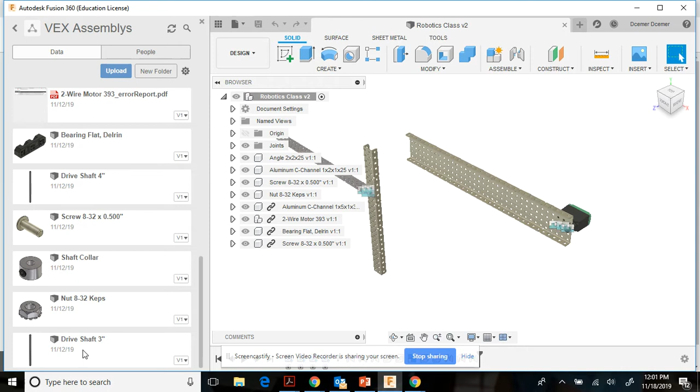So we're going to start with this drive shaft today. Drag that into your assembly. Once again, if you notice my workflow, I try to make sure that I move the parts as close to my work area as I possibly can without overlapping them.

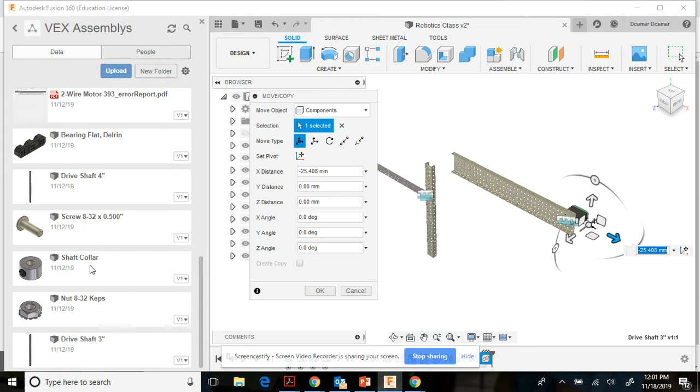Press enter. We'll also use this shaft collar, so that will need to be moved closer to the work area as well.

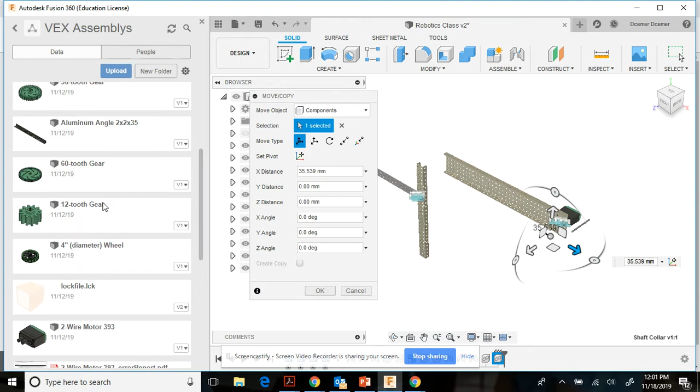We're also going to experiment with a 12-tooth gear. Say okay to that movement and then bring in the 12-tooth gear. Finally move the 12-tooth gear close to the work area as well and press enter.

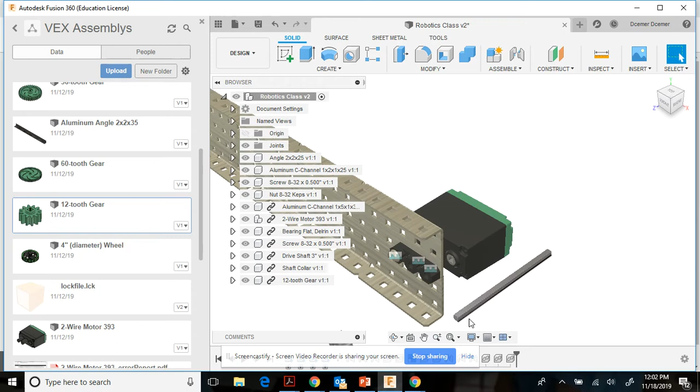Let's set a good zoom level for ourselves where we can see all of these parts, and we'll close out the data panel because we won't be using that again for day 4 activity.

A couple of items of concern as we're about to start on this joint. For a revolute joint, we need to be able to access this circular end point of this drive shaft. If you're not zoomed in close enough, you will not be able to access it correctly.

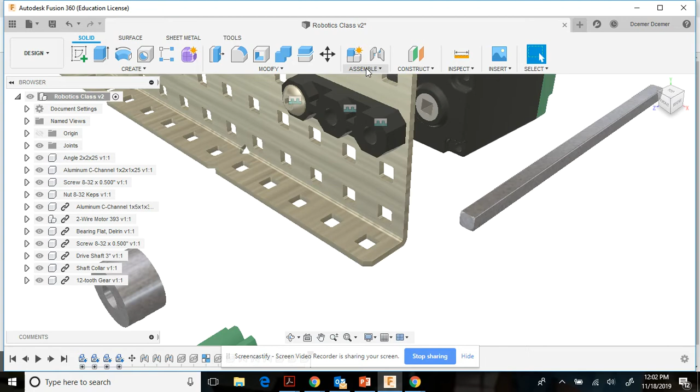So we want to assemble a joint, and we're going to use that circular end right there, as well as this particular circular part right here that puts the joint origin right in the center.

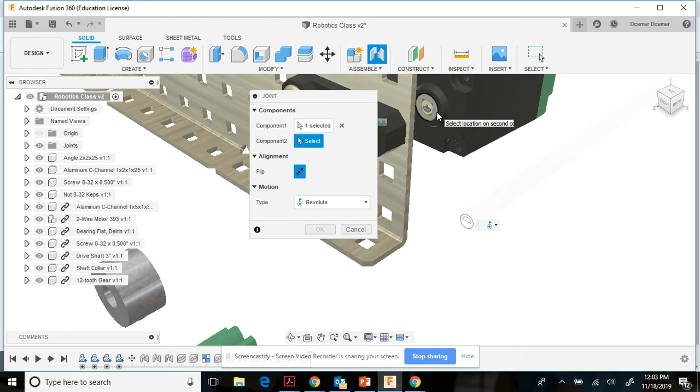Very important to make sure that it displays exactly the way I'm showing it right now. Okay, so once that's in place, we can flip it and insert it into the motor a minimum of 3 millimeters to ensure that it's good contact, and we'll press enter.

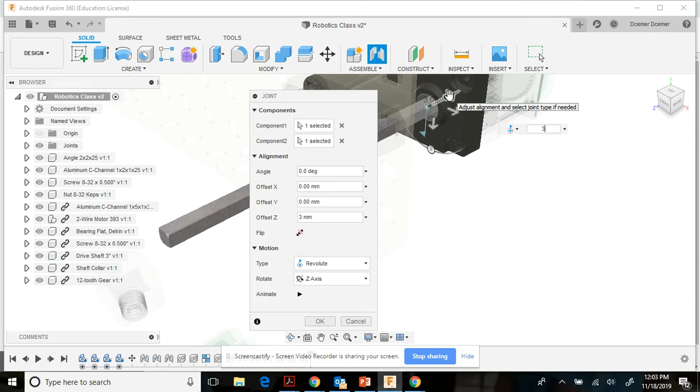Again, if we are wanting to double check that, we can right click on this little flag and say animate joint, and it does confirm that that is actually locked into the motor correctly. Press escape whenever you're done with the animation.

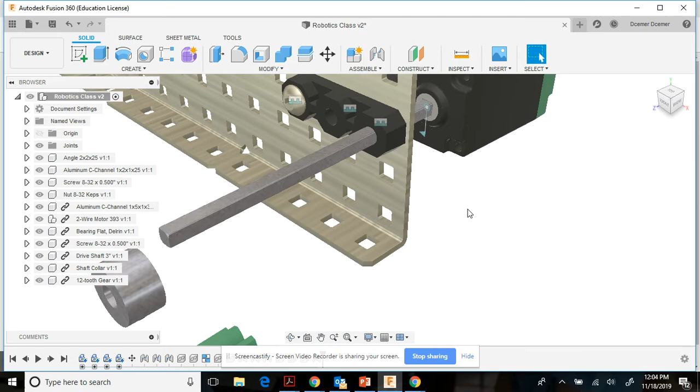Next, we're going to put a shaft collar in the correct location. So let's pan over just a little bit. We'll say J for joint again. We're going to use this part of the shaft collar, and then once again, this part of the drive shaft itself.

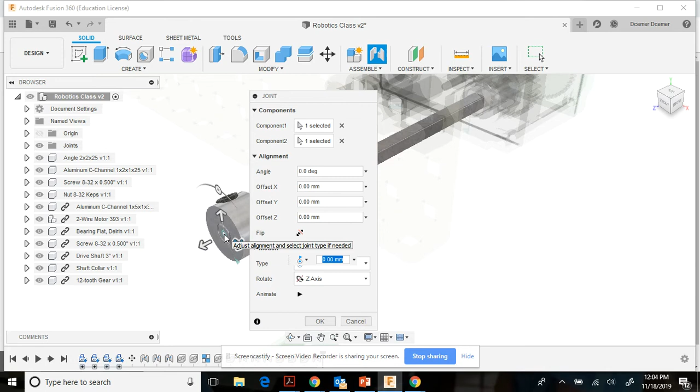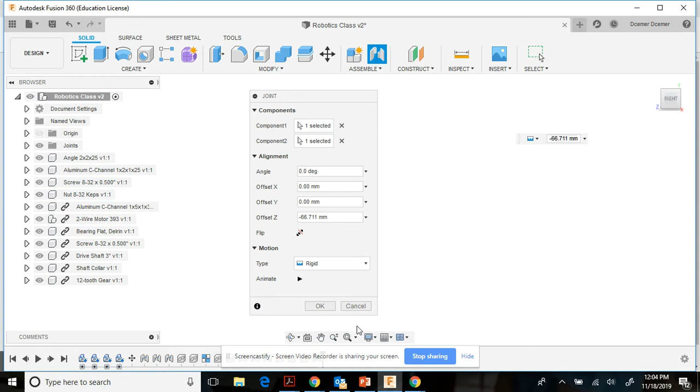We are switching away from the revolute back to a rigid because we want the shaft collar to rotate with the drive shaft itself. So we're going to move that to a rigid. And I'm going to use the right side view here to make sure that I have oriented this correctly.

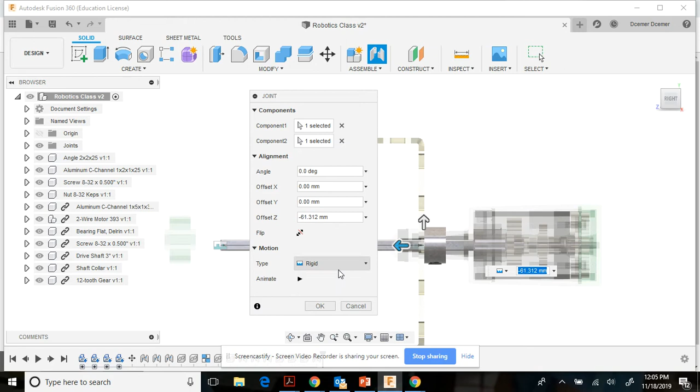Move the shaft collar into the correct location, which is about right there. In real life, in the lab, if we were working with these parts, we would put a little nylon washer in between there to avoid metal to metal contact. But for the fusion work, it's not required today.

So we'll say okay, and we'll go back to a home view and finally work with this 12-tooth gear.

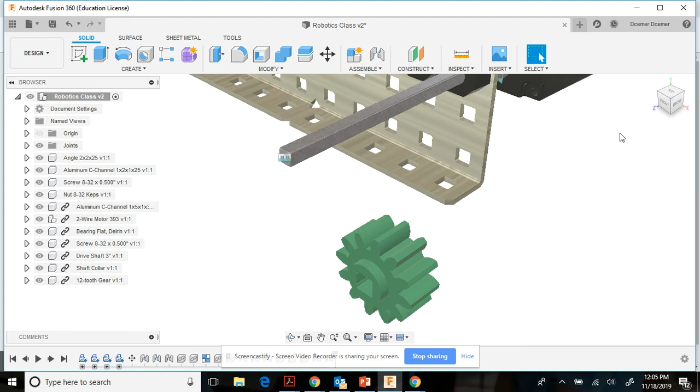Next, on the 12-tooth gear, we want to create a joint and base it off of that and this same joint origin from last time.

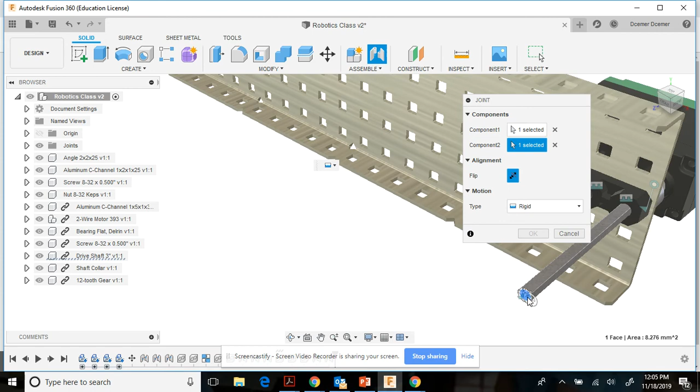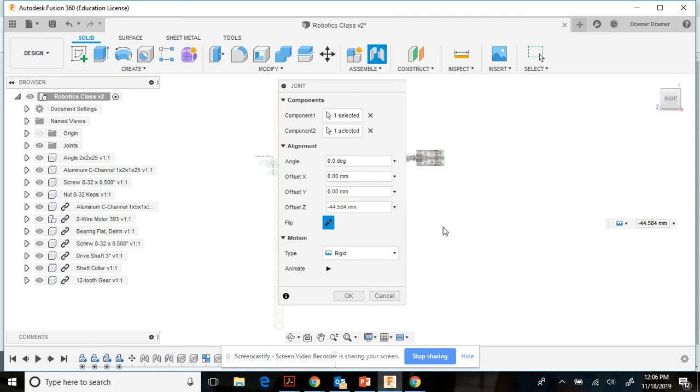Zoom back out just a little bit. Move this out of the way and rotate the view cube enough so that we can confirm that we're sliding all the way until you have contact with the plastic bearing.

And that is approximately 44 millimeters. And press enter.

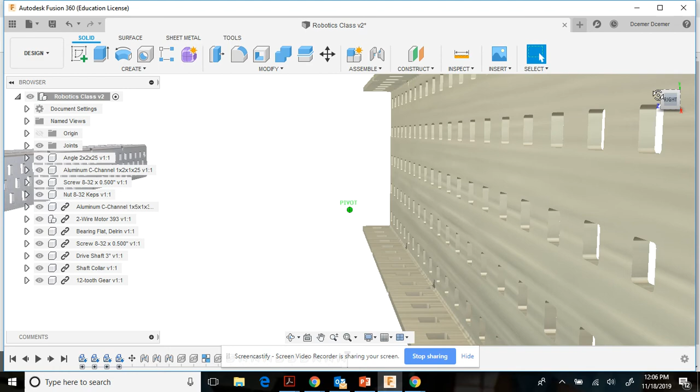This will complete today's activity. Once you have worked that far along, I will be checking your progress.